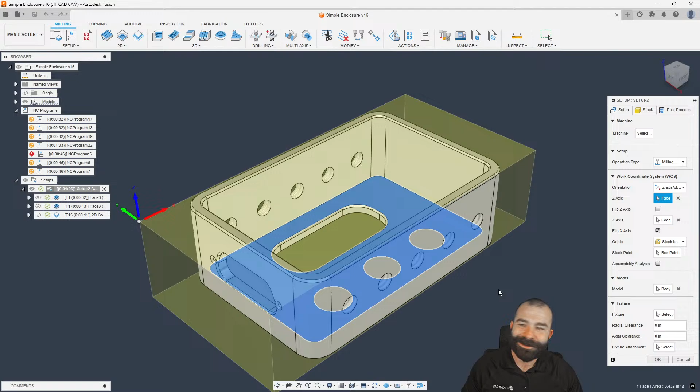Oh, dude, I tell you what, it's Friday, man. Yeah, I can change my screen. How's that look? You want me to start over? Let's start it over. I tell you what, guys, I have the worst luck. I need somebody to sit in the background and change my screens for me and fix my audio. Maybe one day I'll be a big enough streamer for that. So let's start that over.

So as I was saying, I'm going to go ahead and go into my actual setup to my part, and I'm going to select the machine. Now, in this case, if you don't have a machine or you haven't downloaded that machine, again, you guys can reach out to me. I'm happy to help you guys and build content around this, as I've built several videos around machine simulation. But what I'm going to do is I'm going to create a machine definition.

Now, the key element here is in the kinematics menu. I'm going to reorder some of this to set it up as if it is just a standard kind of table, fourth axis, maybe like a Fadal 4020, Haas VF series, things of that nature, right? So what we want to do is we want to organize everything. So our A axis sits on our X, on our Y. Our Z axis, of course, has the head to the machine, and so forth and so on.

Now, commonly, your rotary axis is going to point a specific direction. If you're dealing with an A axis, it's probably mounted on the right side of your machine. Now, for some reason, I've seen this, you actually mounted it on the left side of your machine. Well, you actually have the ability to go in and set a custom orientation. Now, what we're doing is we're spinning around X, and you could say either in a clockwise or counterclockwise fashion by just simply changing that one to a negative or a positive, right?

Same thing would go, on some machines, maybe you mounted your A axis to rotate around Y. Again, we can go in and we can plug in that, creating a custom controlled rotary axis with our machine. Now, if we're working with something a little more advanced than that, I would actually tell you the best thing is again, we build you a machine definition for 5-axis. But as you're going to see here, somebody just brought this to me the other day. They're actually working with an A-B axis machine because of the way their rotary is set up. And from that, it is still the same kind of system.

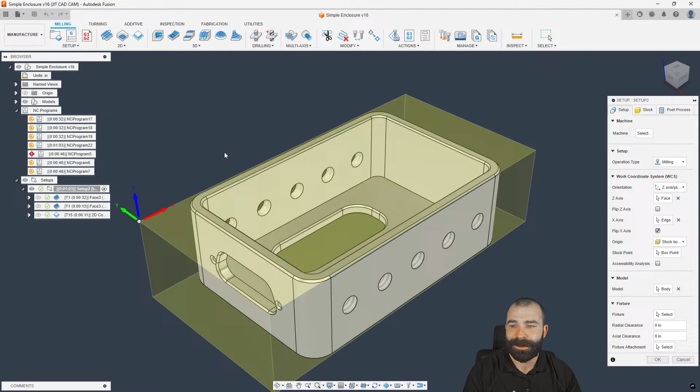Maybe we lost Brett. Presumably, I'm going to guess Brett wants to see polar machining around the C-axis, but he may be talking about something with the A-axis. Now, if he was talking about something with the A-axis, what we would really need to do is start to work with rotary contour and rotary parallel, right? That would allow us to create our live A-axis motion, whether we're doing a pocket or machining out those areas.

Now, if we wanted to do something with C-axis polar milling, what we may have to do is, one, have a toolpath that allows for it, but two, when we post out, we need to make sure that the post supports this. Again, if your post doesn't support it, we're happy to add it, but I'm going to take this Okuma post just because it's sitting here. We're going to hit edit, and as you can see up here at the top, there is no actual NC command for polar milling.

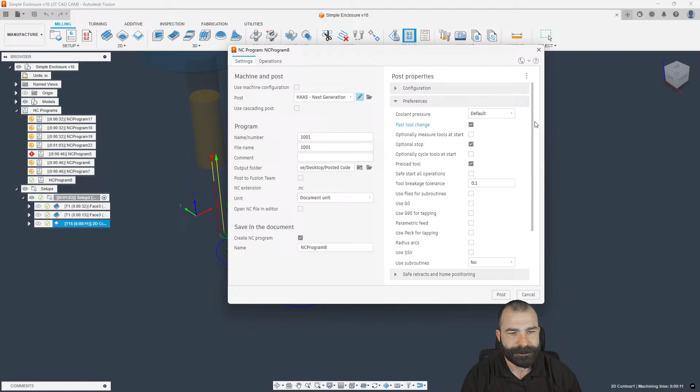Yep. So it's kind of like I thought. So C-axis on the UMC. Okay. So in your case specifically, Brett, I'm going to jump over to the Haas Next Gen control, and then we're going to edit this post. And with that post, you're going to see you have what's called use polar mode. So I'm going to highlight use polar mode. Then we're going to go back to our actual G code, and I'm going to add a manual NC. This needs to be an action. And then we're going to post in that use polar mode.

Now, if this is something you're going to find yourself doing quite often, I would highly recommend storing this as a template, right? So if I was to store this as use polar mode, in the future, all I have to do is right click on my setup and create from template. In this case, we're going to do the use polar mode. Again, I need it prior to the toolpath I plan to use it on. And from here, I'm going to go ahead and post process. Again, we need to switch to that Haas Next Gen control.

In this case, I'm not using Machine Sim, guys. You should use Machine Sim, but we're going to put it on a UMC 750. Let's see what we get for G code. So we have successfully posted. And in this case, you're seeing now we're doing an XC move around that part instead of XY, and I could repost this without the polar. Let's go in and post. We'll swap this out to 1002 using the same settings. And now we could do our side-by-side comparison.

So one, you're going to notice this program on the left is a mile long. That's because we are using XZC for all of our moves to go around that part. Now, over here on the right, we're just doing nothing more than a G1 and a couple of G2s to create those straight lines and arcs. So as you can see, Brett, it's very possible to use polar inside of your specific machine. You just have to create the manual NC action in order to achieve that.

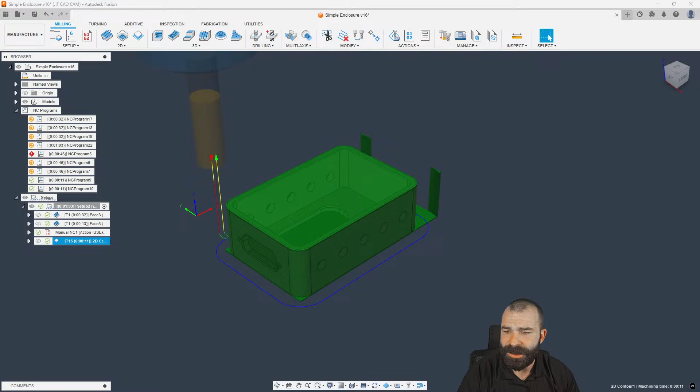So I see, Scott, you do have a question there. It looks like exporting sketch geometry to a step file. So yeah, you can't export out a sketch as a step file. You could export out a DXF. So again, if you wanted to export a sketch at any time, you wouldn't be able to do that as a step file, but you can definitely export sketches as a DXF at any time by right-clicking on that sketch and saying save as DXF.

Let's jump into this sub-spindle. I saw a question about sub-spindle. Travis, I think you missed it last week. We talked about sub-spindle just a hair, but let's go ahead and get a part out so that we can talk sub-spindle, what it looks like to do the grab and the retract.

Now, I did get a question this week: a customer was running a Mazak, and they were trying to do the sub-spindle, but it got to a line of code and it just stopped. As most of you know, on some of your mill turns with a sub-spindle, you have to define the sub-spindle offset in the controller. On most controllers, that is a B-axis offset, and you traditionally touch it off almost as if it is a tool, so that you set a length and the controller knows how far to bring in that B-axis. Now, if you work with somebody like Reynolds Machines and have a smart machine, they actually run a macro that always knows that number.

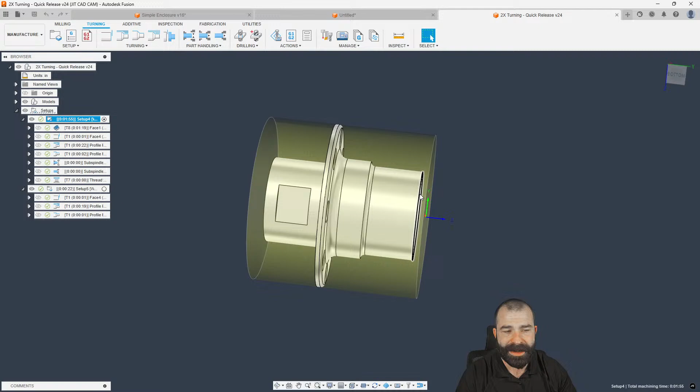Again, a little different scenario and a little bit of a change of a post, and we have that ability to set that up. So let's go ahead and remove what we already have here. So far, I've got my first setup. Again, nothing fancy. We're just doing a turning or mill turn, primary spindle. My part is selected. I have a couple of toolpaths already on this part, as you all can see. So with that, we can go ahead and start to work with our Sub-spindle.

Now, as always, the post does have to support the Sub-spindle, and there are tricks to that. But what you're going to see is we're going to start by doing a Sub-spindle grab, right? So what I need to define is the ability to grab onto my part. Where do I want to grab? As you're seeing here, this is actually being calculated from my work offset or the origin of my part in this case. And I can set that grab distance to whatever I feel necessary.

Now, it is wise to make your soft jaws, of course, make sure that they are going to be able to grab wherever you're grabbing, as well as that profile. But as you can see here, we could set our grab plane as 1 inch from model front. Now, if you wanted to make numbers a little easier to read, you may actually go based on your actual stock front, which in my case is where my work offset is. And we are now grabbing 1 inch in.

Maybe we take that a little bit further. But as you're seeing, we're just defining how far to rapid to and then how far into our part to come in and grab onto it. Now, if you don't want to do this in a live scenario, we can turn off our spindles at any time. But as you see, the grab is relatively simple.

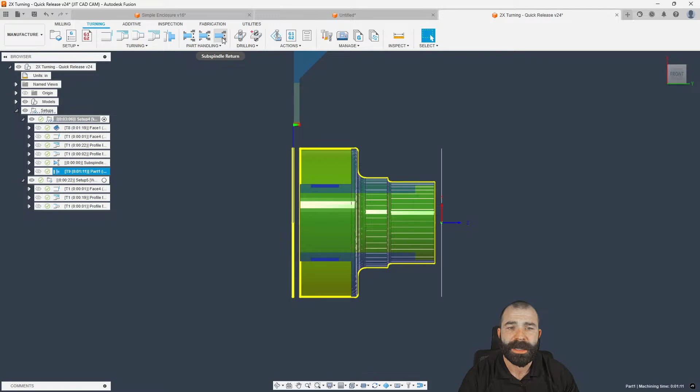So as you can see, we're now pre-staging that part off tool at the back of my part where I want to part off, so that I'm already there before we come in and actually set up to do our return, right? So now we've parted off our part. We can go ahead and do our sub-spindle return in this case. I'm going to send it back to a machine position. You can define on certain machines a machine position. Again, that may, for example, be -8 inches from your home position.

And then, because we parted this off, we want to keep both of our parts clamped, right? We don't want to release what's in the headstock when we move over to our sub-spindle. So we're going to go ahead and hit OK. And that is basically it. All you have to do is really define the grab as well as the return completely separately.

So sub-spindles have an offset for their jaws. It does. Again, a lot of controllers support that. I can't remember what it is off the top of my head because it's very rare that I have to set it.

But for a good example, maybe I'll go back to the bird's-eye view, right? You have your 3 jaws, and if you don't have them aligned and they need to overlap, you would collide your main and your sub. Your controller has that ability to set an offset in the C-axis in order to control that. Travis, I hope that answers your question.

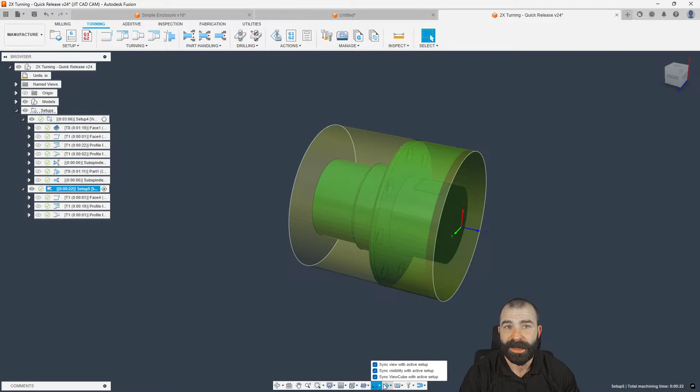I guess I can expand on this. Now that we've done our sub-spindle return, what we do need to do is say on our second operation that we are in the secondary spindle, so that when we program inside Fusion, we're actually working on the sub-spindle, not the main spindle. From that, we could also make sure our stock is from preceding setups, making life very easy. And as you can see now, my stock has automatically flipped around because I have my synchronizations turned on. I highly recommend this for a lot of you. That stock from setup 1 has now carried through to setup 2 as we're working back the other way.

So I see another question come in. What do I think about the heights? I have mixed feelings about it, but the more I use it, the more I like it. I think I'm just one of those guys that's been using it for the last 8 years, and it's a hard habit to break, right? And again, I think we're going to see more of that transfer over possibly into the lathe side of things. It would be nice if we ever see machine sim in the lathe, that we're going to be able to see our chucks and set everything from chuck heights.

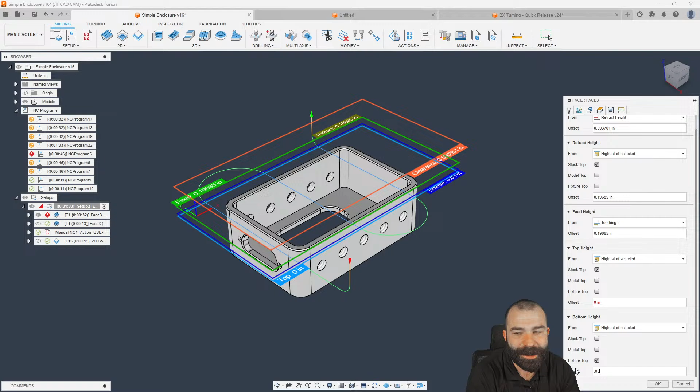Again, if I go back to my simple enclosure here, for those of you that don't know, the heights tab was recently changed. However, a lot of the information is still the same. If you're somebody doing 3-axis work, it's probably more of a nuisance now because you had to relearn it. But once you relearn it, it's a whole other ballgame. The fact that you could aim for a bottom height of the highest of selected, and then say fixture top, which a lot of people overlook, means if I had this sitting in a vise, I could go all the way down to where that vise is and still stay maybe 50 thou above that, right? So there we go, I'm back. Once you start to get comfortable with it, it's very valuable for being able to set up.

So I see a few more questions come in. How to import a vise and/or part into the machine builder to check part clearance, and is there a way to default a vise into a setup? So Brett, there's no way to default a vise into a setup at the manufacturing level. I do have a really good video on this where we do one part with multiple vises or multiple setups. But in this case, I'm pretty sure I should actually have a jig and fixture already built. It's been a minute since I've used this jig and fixture, so we may have to clean this up. So let's open this up before I bring it in and start to work with it.

So what I've done is I've built what's called a parameter control vise. And what that parameter control vise has the ability to do, and what you're seeing me do here is I'm actually removing this dummy part out of there, is I have all of my information set inside of Fusion based on whatever I need to define or however I'm going to machine my part, right?

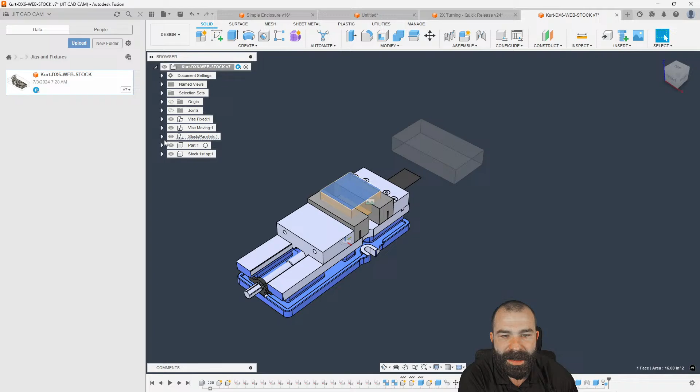So again, it looks like this vise has had better days, and I may need to do a little bit of fixing on this. So let's see what we have going on here. You guys are going to get to experience this in the real world scenario of me trying to troubleshoot a vise that I built a very long time ago. And let's see here. So we have our vise jaws. It looks like, oh, yep, that was probably overrode so that we could do something else with it, right? So let's leave that at 2.625, I think is the number we're going for.

Again, you can see that that stock actually sits on those soft jaws. And as you're seeing, this vise was completely brutally broken one time long ago. But as you can see, now that I have a stock here, I'm going to go ahead and remove my other stock because I don't need it. Let's go ahead and get that out of here. But as you see, we now have our actual stock. We have our vise jaws and everything set.

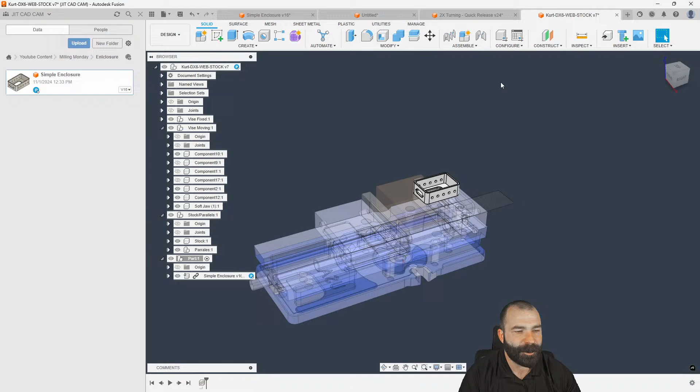This is where I would go to my part location and I would bring in whatever part I'm working with, right? So in this case, we're going to go back to that enclosure. I can drag in that actual part. That is going to place it now at the component level of the part. And again, this is where I could use a joint to place this. We're going to find out how badly broken this model is here in a second.

And now, again, as a lot of people ask me about this, yes, I'm using a physical stock body here, or a component for stock. And the idea is that I can trigger a lot of toolpaths from this, right? So as you're going to see, I'm going to go ahead and go to my parameters page. And I think we might luck out here. So we do have stock sizes as well as a parallel height.

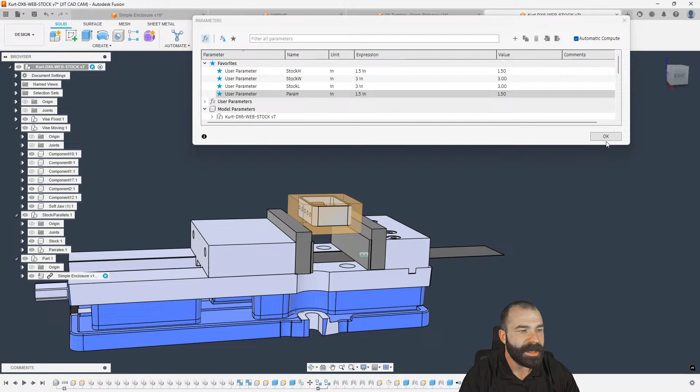So if we go ahead and change my stock to 2 by 3 by 4, actually we could go 2 by 3 by 3. Maybe we go 1.5. You're seeing that vise update in real time, even to the extent of how big my parallels are to raise that up, right? So as you were questioning about the height side of things, right?

When I go to manufacture this, I do have this set up already on this lovely Brother machine because I'm pretty sure I was testing this machine sim for none other than Hybrid Machining, if he's still in here. But what's going to happen is when I create my setup, again, we have that ability to go through and redefine everything. My stock is coming from my solid that we created as stock. So we don't need this one. We need the stock box. Again, my setup, XYZ position. My model is based on my parts.

Now, I can go as far as setting up my fixture. Again, you have that ability to define all of this as a fixture as well that now is controllable with radial and axial clearance, right? Again, our part position, in this case, where do I want my part to sit? In this case, I could go ahead and place it on my table. I know this is a little ugly as we're moving quick. We're also backwards based on that vise. But as you can see, you can get it all in here.

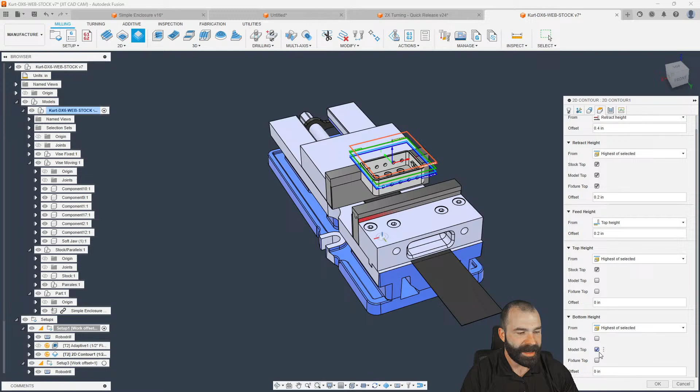And then as we talked about, if I went in and did something like a 2D contour around my part, again, my lowest bottom height could actually be set to highest. And then I could say, go to fixture top and 50 thou above fixture top. So again, based off anything and everything when you're programming, we're automatically recognizing now with that new heights feature that we want to go above the fixture a certain amount.

Now, if I was doing something again with a 3D roughing scenario, I actually did a video kind of talking about this last week, we have what's called fixture avoidance, right? So again, this is very valuable when you guys are working inside of Fusion, where down here I have a radial and axial clearance, and I see Matt in the chat, not to throw Matt under the bus. I feel like Matt messaged me about this last week.

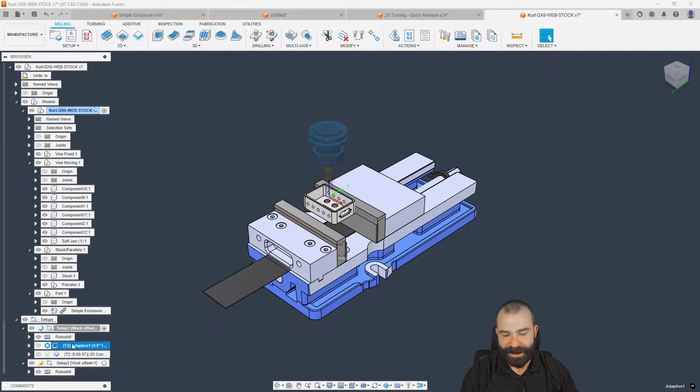But as you're seeing, I can set my radial and axial clearance to be much smaller, again allowing that toolpath to get much closer to my fixture from a 3D toolpath standpoint, right? So again, I've seen this quite a bit where these new settings, although they seem like a nuisance at first, as you're seeing programming become quicker, it's actually helping your templates out if you're a template person like me, right?

So I did see a couple more questions come in. Brett, I hope that kind of answers your question. There's no default way to use a vice. You could put the vice in the machine sim if you wanted. I highly do not recommend that at all.

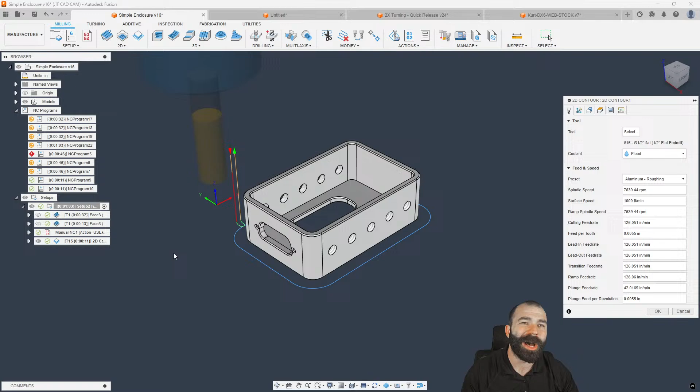Yeah, they did update it, and it was a bit confusing. I think the confusing part, and this is just my take on it, maybe Autodesk listens to me, it's too late. But I think if we would have actually set it like two updates apart, right? Update number 1, don't make it where I have to select highest or lowest. I really did like the fact I could come in here and say model top, stock top, yada, yada, yada. I think that would have been cool.

But because you now say highest, you could actually grab all 3 things as a precaution, and then it would avoid that based on what is the highest or what is the lowest, right? So that's, in my opinion, again, you give and take, right? Sometimes there's good, sometimes there's bad.

So let's see, we got another one. Is there a way to force Fusion to use polar mode by default without putting manual NCs each time? Technically, there are ways to do that, yes, inside of your post. I would need to know more, if it's on the mill or on the lathe side, as to why you're forcing that or wanting to force that.

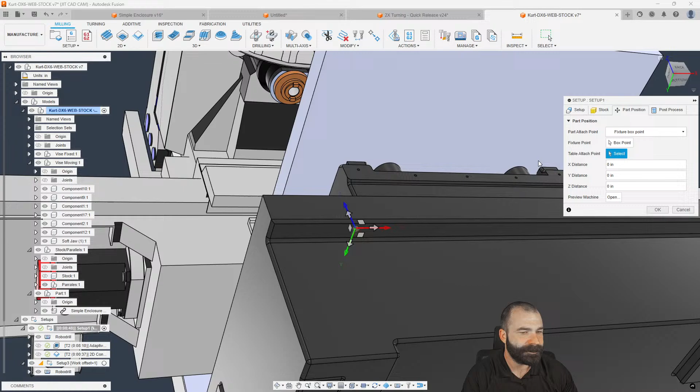I'm also going to go through and possibly fix this terrible setup here that all of you are probably wondering if I'll fix. There we go. And then we are going to do fixture attachment down here with this joint origin. We have our table attachment. There we go. Cool thing too, as you guys are putting those questions in chat, you can now preview on your machines too. Kind of a nice thing to see, are you going to over travel your machine or not?

Now, this machine isn't built with limits. If this machine was built with limits and you are working with the concept of something having more or less travel than needed, you could actually see that in real time here, right? So we could put our part on the table. And what I like to say is I can now program and know when I go to the machine, where does the part need to go, right?

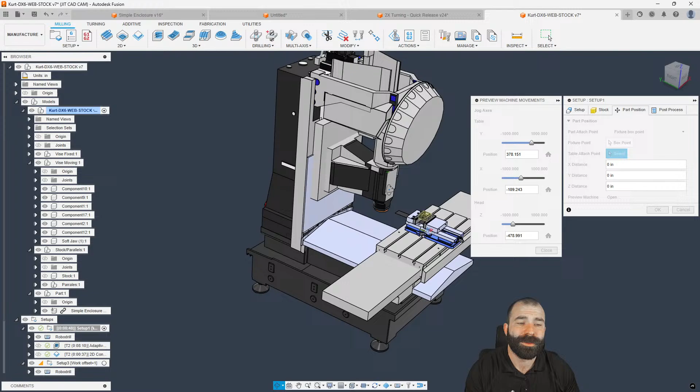How many times have you made that mistake where you go in and you put the part somewhere, then you go try to program it, and then you get machine over travel limits at the machine? Fusion with the right machine sim build can actually handle that for you and tell you issues before you ever get out to that actual machine.

So I see Eric in chat. Hey, Eric, nice to see you once again. Looks like you're in the shop. So if you guys didn't know, Eric actually makes bagpipes. So they use some older lathes and a little Mach 3 mill, and they do woodworking, but they use Fusion over there. I got the chance to stop in and meet Eric and have dinner with him and his family, and I had a great time.

That actually leads me to ask, where should we go? Where do you think JIT CAD CAM should go for the next road trip? So I do know I have a few things in February down in the Chicago area, but I really want to start to make our way out to the West Coast at some point.

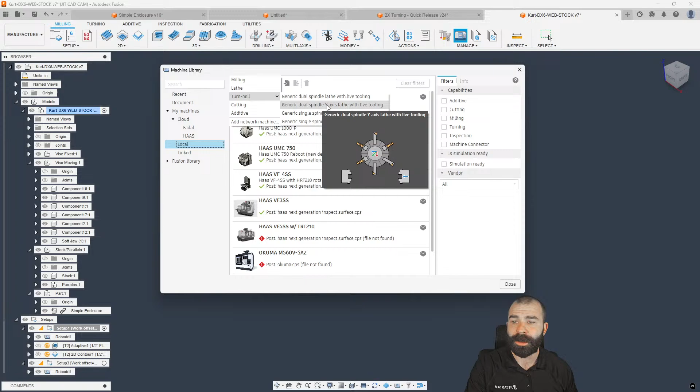So I've had quite a few people reach out to me that have just a generic spindle lathe with live tooling, and because that machine doesn't have a y-axis, it will not actually post out those y-axis moves, as you can see here. Now, if your machine does have a y-axis, of course, you could always add that back in. You also have main spindle versus sub-spindle type setups as well to be able to define your machine inside of Fusion and control your post and not actually have to spend the money for any of those post-processor edits.

Eric, I don't know if you know this, anywhere is warmer than where I'm at in January. We get more negative temperatures in January than some places get positive temperatures.

Yep. So no y-axis. So again, if you built a machine definition here, as you see with no y-axis, it will actually force all of your... There we go, and we're back. So if you build your machine without a y-axis, it will control most post-processors and not spit out y-axis moves when you're posting. So it'll put everything in XC automatically.

Cool, cool. Any other questions? Anybody else have anything else? I mean, we're really hitting the ground running today. We're 35 minutes into this, and I think we've gone through 15, 20 questions. I'll give you guys a few moments to put some stuff in chat if you have any questions.

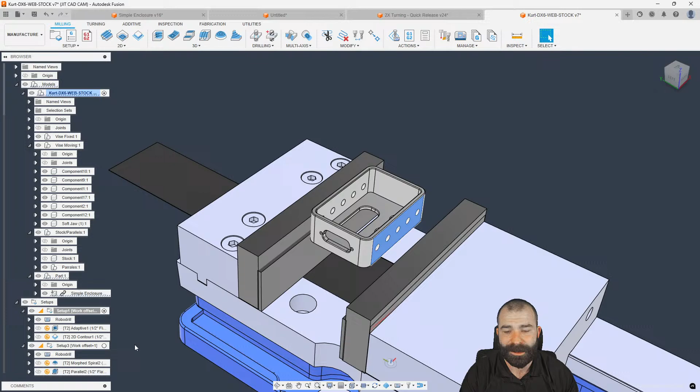So what they wanted to do was use the avoid surface machining. Now, they did a lot of work to just not machine on this side of the part. However, what we discovered was something kind of funny about the avoid machine surface settings inside of Fusion. If we were to go in and set an avoid surface and pick the side of our part, it didn't actually change their toolpath at all. So I'm going to set this up right here. I'm going to hit OK. And what you're going to notice is this toolpath basically looks identical to what we've already done. So it's not actually avoiding that surface.

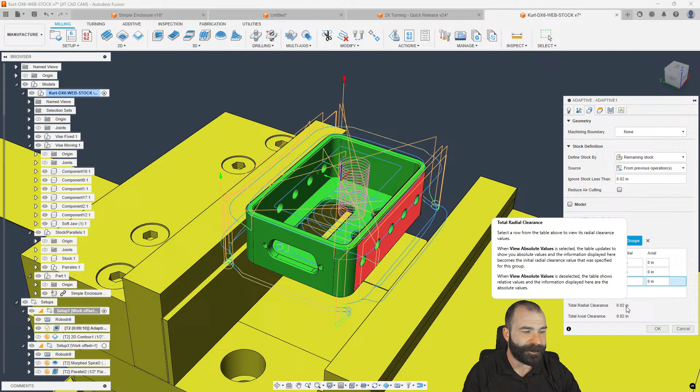It's still machining along the surface, but it needs to be given a dimensional tolerance of how far you want it to actually stay away, right? So this is really handy, and we'll look at a couple of scenarios here. But let's say I want to stay away from that wall by 0.1. By adding 0.1 in there, what you're going to notice is we are now going to avoid that outside surface of that wall of that part.

But now something to keep in mind, this is a dangerous game to play because as we're avoiding on this side over here, we will start to avoid on the inside of our part.

Now, again, Autodesk, if you guys are checking out this channel in any way, shape, or form, we appreciate you for watching the videos. But when we define avoid surface in certain scenarios, we may actually not want it to go to both sides of that wall.

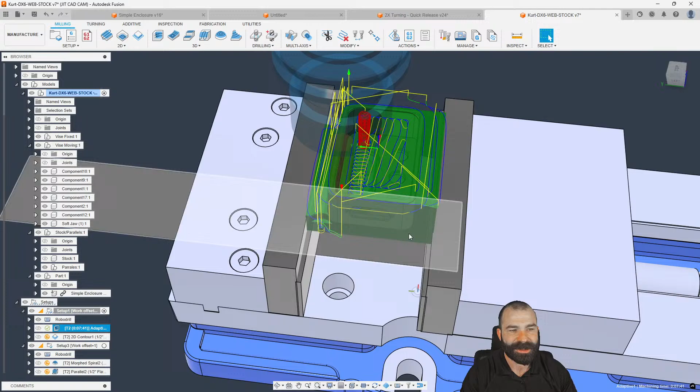So if I was to get really crazy here and say 1 inch, what you're going to notice happen here is based on that wall of avoidance, we're probably going to get no toolpaths down there on that side of the wall. And actually, we're not getting anything inside either. So as you can see here, it might be a little tricky for some of you. Let's get the toolpath out of the way.

Notice how we are staying 1 inch away from this surface on both sides of our part, right? So we're 1 inch this way and 1 inch this way inside of our part. So that avoid touch surfaces, when you're dealing with close walls to pockets and things of that nature, can actually cause some additional problems that some of you may not be aware of.

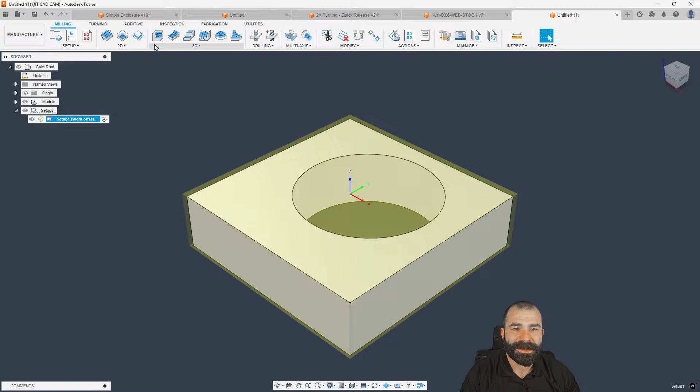So when I machine something, again, this is a relatively simple part, nothing crazy here, if I wanted to go in and do the bare minimum to machine this part, what you're seeing me do is I'm using 3D toolpaths, right? Let's see if we can pull one of my favorite tools, the 1/2-inch flat, for all of you out there. And as you can see, we're now roughing out that part. We're leaving basically 20 everywhere and anywhere.

And then if I went back and I used 3D contour, now this is where that avoid touch machining can actually come in very handy, right? So I could go in and I could say, you know what? I want to avoid this wall by 10, right? Because I'm going to come back and cut this wall with another toolpath, but I would still like that tool to go all the way through and machine all those surfaces, right?

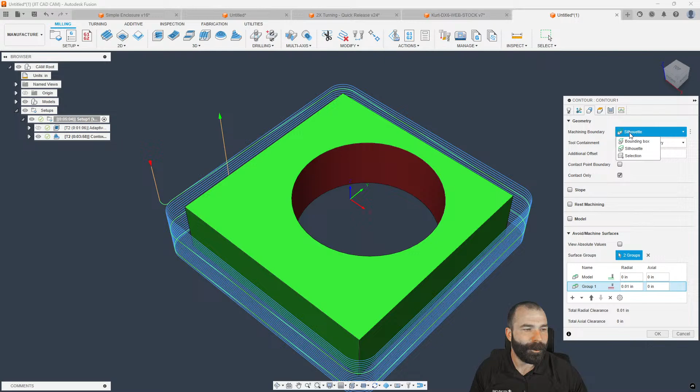So again, this is something that you could set up inside of Fusion. And what we're going to do is we're actually going to say selection boundary and then give this nothing and try to get a toolpath on the inside of our part. And of course, because it's a through hole, go ahead and change that into a flat bottom hole to show you what I'm trying to signify.

Let's go ahead and add that. We're going to go ahead and do another extrude based on that sketch. And for the sake of this, we actually have to do two-sided here. There we go. And let's go back to our manufacture. So again, let's go ahead and regenerate everything here. We're going to go ahead and edit this. We're going to go back to our silhouette.

And now you're seeing that we're actually machining inside of here. And the game plan is to still leave 10 thou material on these walls, right? So that when I come back with my final path, I can actually do my 2D contour with my wear setting and not have to go out and cause all these additional problems and force something through, because I now have control at an individual surface level on how close that gets to everything.

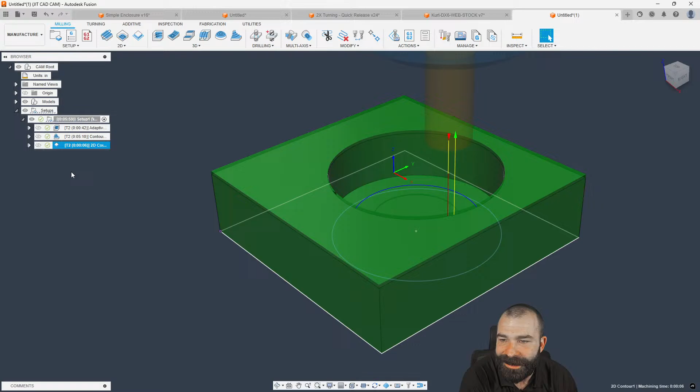Well, that's good. I mean, everybody's new at some point at everything they do, and I'm glad to see that you chose CNC machining. I actually have a really cheap CNC router in my garage that we did some Pinewood Derby cars on, and I've always thought to myself, maybe I should make on-machine content for the absolute beginner. You know, buy a $600 router, learn about work offsets, learn about touching off tools.

With that, I'm going to open the floor back up to anybody and everybody. If anybody has any questions at any time, feel free to throw those in chat. Let's go ahead and see what you guys have. I'd love to see the problems that you've encountered throughout the week or any oddball questions that you have about Fusion and being able to use it for your manufacturing experience.

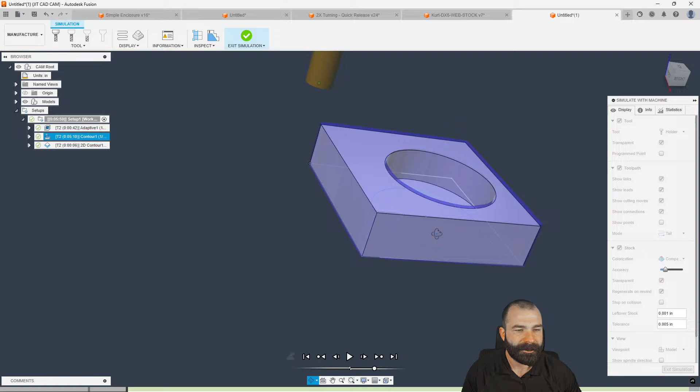So again, I'm just pulling this up so you guys can see it. We went ahead and left our 10 on our walls around this part. Based on running through our machining, we're going to go ahead and skip to the next set. And then from there, we could go through and do our final pass and clean up that wall. And what you're seeing is those surfaces are being removed.

Again, I have my accuracy turned way down. That's why you're kind of seeing the overlapping surfaces. But that's kind of why I like the new avoid touch machining, it's a new way to think about how you can actually set up those parts. Can we do a demo on inspection programming? I assume you're talking about Surface Inspect, right, Brian?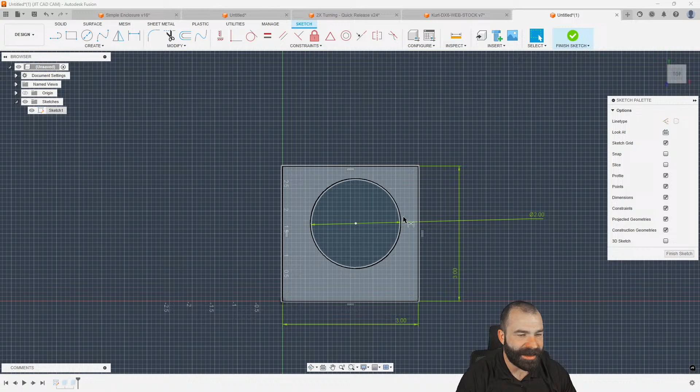So I'm going to go ahead and set up some inspection stuff here. But before I do so, let's go back and just kind of fix this part in case you guys want to see the G code on this. We'll get some pretty standard numbers. And I'm just going to put this right on center. And from that, we now have that easy to use shape for the inspection.

So what I'm going to set up is I have my setup here for milling already. I'm going to jump over to the inspection tab. Now, I am going to tell all of you that in order to do anything other than WCS probing, you do have to have the manufacturing extension.

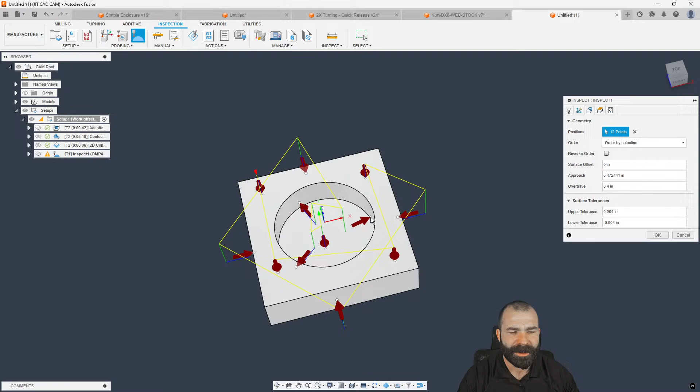So let's say, for example, I want to pull 4 points around the top. I'd like to pull also 4 points around the outside of my part. And then lastly, I can place however many points I want inside. Let's add a 4th one to the bottom. Now, something neat about this path is I have the ability to always drag and place these points wherever I want them. Now, what I would say is this is a generic version of a CMM.

And the reason why I say it's a generic version of a CMM is because this is not going to give us GD&T data, right? Like, this is what I like to use for first article, last article, idiot proofing, like you just pre-finished an entire mold and there's 5 thou everywhere. You go in with this probe and then it tells you there's 5 thou and you're like, okay, good thing we didn't take that out, right?

So now we can set a lot of things here as well as our tolerancing on this part. And from that, we're just going to go ahead and hit OK. Now, what you're going to do is a traditional approach of posting out this code. You will need to use the specific post for this. So again, based on what you're doing at your machine, there are several post processors inside of Fusion.

Again, what you're going to look for is the inspect surface or inspection post to make sure that that goes out and does it. Now, if you can't find one for your machine, again, guys, just reach out. But what I'm going to do is I need to cheat the system.

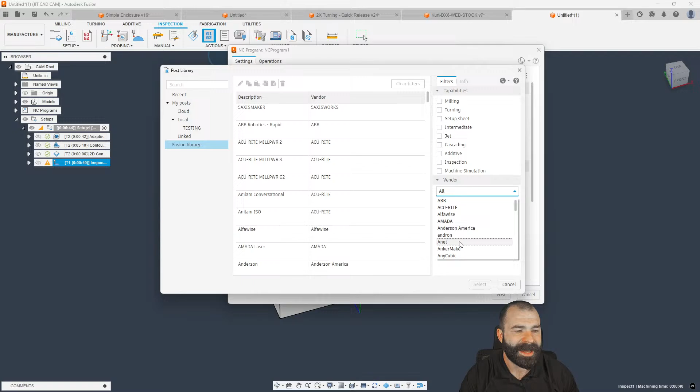And the reason why I need to cheat the system is because I need to actually use a random point generator built by Autodesk. Now, all of you can use this also, same post, where I'm going to go in and we are going to do an inspection results probing, right? So we're going to go ahead and select this. Let's just go ahead and throw it in my local library to be deleted at a later date.

What is now going to happen is we are going to auto-generate points of all different sizes in all different areas. So from this, we're going to go ahead and make sure this goes to a folder we can bring it back from. Now, what is being generated is, like I said, this is what your machine is going to dump. This or something very similar to this, right? Fanuc, Fadal, all these different machines. Maybe you ever run a Renishaw probe. Maybe the probe is spitting out different data.

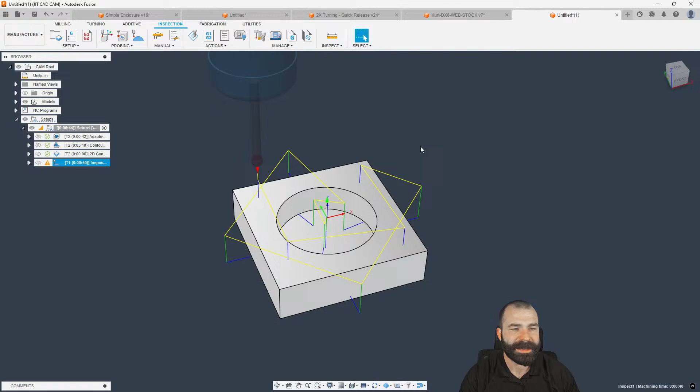So now, again, these are random points. They are random sized points. Yes, this part is way out of spec in every way you could imagine, but what you're seeing in real time is that is our inspection data coming back where somehow we've hit 2 out of all of our points in tolerance. And I say in tolerance, but I think you're going to see some of these points are way out of tolerance, that you're probably not going to walk this back in. The nice thing is we can actually see these results in real time. So as you're seeing, we're seeing our deviation, how much we're out, the error limits, all of that data is collected.

Again, this is not GD&T. It doesn't give you concentricity, right? But you could actually go out and create an inspection report off of this as well. And you could give this to your customer or whoever needs this at the end of the day. Again, providing this with your parts and setting you apart from somebody else. So let me go ahead and create that inspection report one time. Let's put it on my computer this time, which should populate in Chrome. And I'll pull this inspection report over.

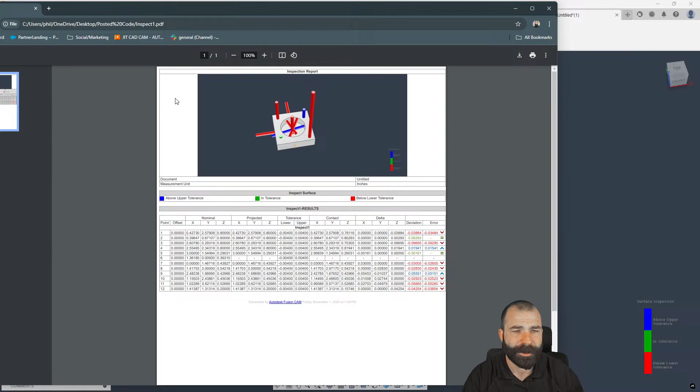Again, as you guys are seeing, you now have your full data points, what's in tolerance, above, below, as well as those points. Again, don't send this to your customer. This is a terrible example. But you have that ability with your machine probe to treat it like a generic CMM and double verify that information.

So give me a sec here, guys. I need to rearrange my screens again and get back to where you guys are all talking about. But I hope that actually answers your question, Brian.

I mean, the inspection results are great here, as well as we could dive in further. And there's also what's called a part alignment scenario too. So if you have to put a part back in for rework, you would actually use the inspect surface and create all of that information. And then we could say we want to realign our part. And what's going to happen is we're actually going to adjust our G code. We're not going to adjust the work coordinates at the machine, but this would allow us to go through and correct a deviation of what's going on.

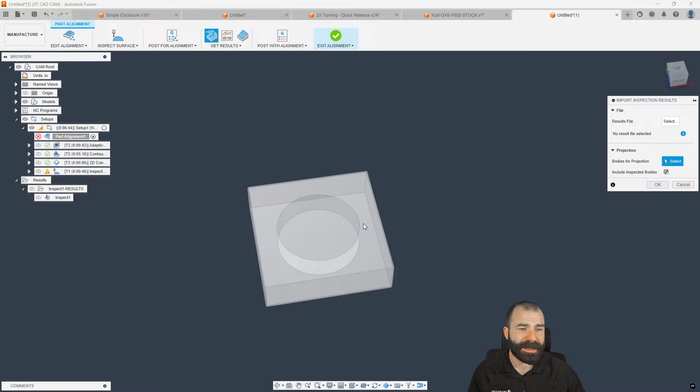So as you're going to see me do, we could go in, create our part alignment. We would post for alignment. Then we would bring in our results. And then we would repost with the actual alignment code for the adjustment. So again, super neat at the end of the day that you have the ability to go out and do this stuff. We go ahead and grab that file one more time.

Again, we've now brought that in. We could show our alignment deviation. Again, these are all random, but what it's telling me is how far rotated we are out. We said 5 axis, how far positionally we are out to average those points back in to get our part into place.

So I see we have another comment down in the chat. Love the videos. What is the best way to learn Fusion? What do you recommend? I'm struggling with a post processor for Okuma turn mill lathe. Well, a lot of things. One, I make video content in a real world scenario.

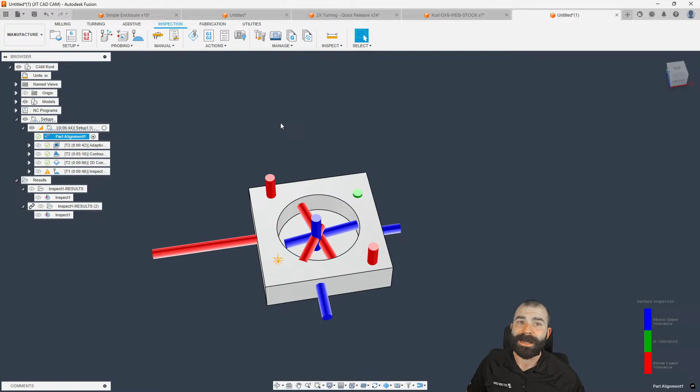I would recommend, though, at the end of the day, depending on what you're doing, the live connection feature of Fusion is a great asset, especially if you just want to chuck the part in, have it auto adjust, auto start the program after the fact, and run everything out.

So I believe, Brett, you can. From my understanding, Brett's question, guys, if you can't see it there in the chat, is if you just chuck the vise in the old UMC and you wanted to rotate C, you can go in with a probe WCS. And I actually did quite a good video on this, as we can actually do angle along Y. So what you're seeing here is I can pull this straight edge here. We could do an angle along Y for our probing.

Again, you could set a tolerance. You could also say if it's askew by a long shot, shut down the machine, and we could actually go up and override WCSs and things of that nature. So maybe you set work offset 1 in this case to be the part perfect, but we're going to use the actual offset number 2 to be able to go through and control everything, right? So again, you do have that angular probing feature for probe WCS to go in and pick those things up.

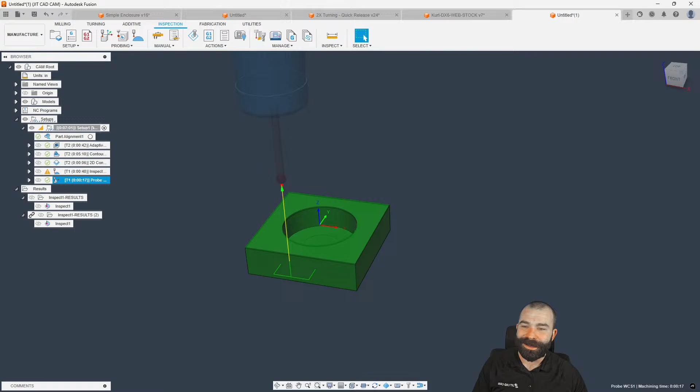This last video, we actually talked about creating custom things in your toolpath to actually, at the tool operation level, control things like smoothing or add special features outside of that.

Now, I did get some funny requests from a lot of you to rename stuff to whatever you want. I don't know what you guys do with your free time.

That's on you. But by all means, you can start to customize more and more inside of Fusion. And like we did on Wednesday, setting smoothing at the toolpath level is massive for a lot of you. And I say smoothing not from a tool point perspective, but machine smoothing, right?

One of the requests I got is, can you change it to smooth criminal and then put yee as the high accuracy mode. I don't know what that was about, but you guys had me laugh.

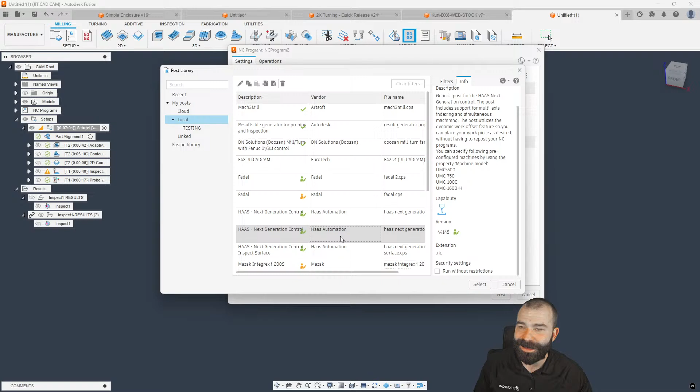So if I was to go in, as you guys have seen me pull a lot of these posts in, this one's 44145. Again, these two are basically the same post, but I've probably butchered one of them in one of these great videos. Now, with that 44145, we can actually verify that with the Autodesk website to see if that post is also up to date. So I am going to pull this up on my other tab as always.

And if you guys wanted to, you could also get there via the tool library button, and then you could actually go download vendor library. This will take you into the libraries online, where we could move back over to the post tab. And then from here, we could check our post. So that was the next gen from Haas.

And then, oh, we need to go to post, not machines. And for some reason, we're not looking at posts, we're looking at machines today. So let's go ahead and go back. Maybe there's a bug on the old Fusion website. As you're seeing, we have a lot of different machines here. Oh, they just put the machine images here. So again, you see how often I get to come to this website and look through everything.

But we could also pull up the post library in another scenario. I don't know why it's not taking us to this page, but this was the page I was looking for. And again, it's still taking us back to there. So again, you can come in and you can verify the version of your post. One nice thing here too is if you're on a later version of the post, I always tell people to go back and look because you never know what has actually been updated.

So a lot of times I see a lot of people ask questions about, you know, hey, TCP cancellation has been broken, right? Well, it's been fixed. It was fixed on 610, right? A couple months ago. So going to the latest post, as long as you don't have a lot of major changes, can tend to remedy that problem.

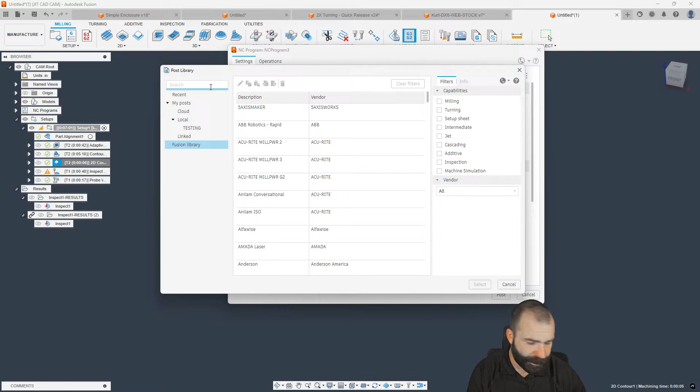So I usually, okay, let me jump back over here. I'm not sure it's MP CNC. Homemade 3D printed CNC. Nice. So if it runs on generic G-code, there's a couple places I could point you, like I said, Reed. You would go off the post library inside of Fusion. Again, there are quite a few different ones out there. The Mach 3 tends to be about as generic as it gets, Mach 3 mill.

As well, something like the GRBL post, very, very simple at the end of the day. And then you could even, if you really had to, step up to something like the FANUC post. Now, again, if you can't really find something, you're going to have to make changes to those posts to make them work. I know from my experience, because of the machine I have down in my garage, the GRBL post has a problem with retracting before going in and doing machining. And I had to make a few changes to that. But that's actually covered in some of my other video content.

So, King Marley, I would tell you, send me a message down below using the link. I'm happy to dive into that on my end. Go ahead and put in a support ticket with us. Let me know where you want it, like what line, and then I'm happy to see what I can do on my end outside of this and get it fixed for you.

Any other questions outside of that? Again, I see people coming and going. We're at 95. We're probably going to cross that 100 mark here in the next couple of minutes.

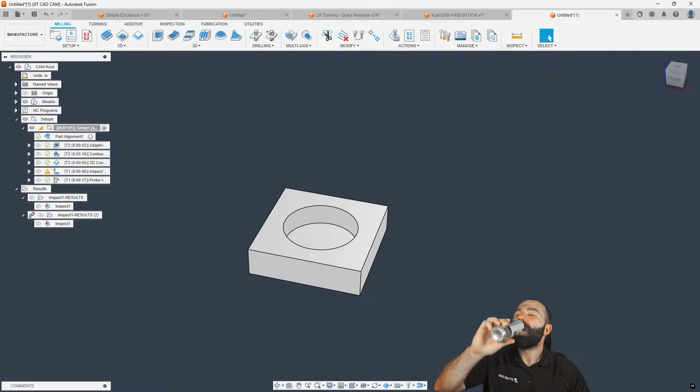In the meantime, let's see here. This has actually been some interesting stuff that I've had some people ask me about: should I get the manufacturing extension? And honestly, in my opinion, yes, because there's so much value in simple things. For example, I had a customer today reach out to me and they had a part kind of like so. Let me see if I can recreate this.

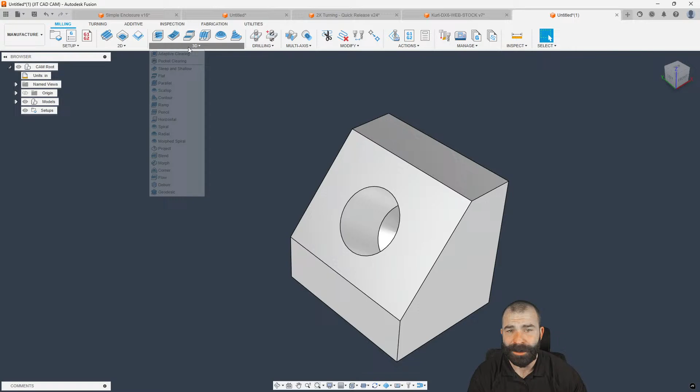And then they had a hole basically right here in this face, right? Now, they wanted the ability to deburr the edge of this hole. There's a lot of ways you could do it inside of Fusion. And honestly, the deburr toolpath was the easiest thing out there because all they had to do was say deburr. In this case, just give it a ball end mill. Again, we'll go to my lovely tool library.

And then from that, just define that I want to use a selected edge and then pick the edge that they wanted to deburr. Again, setting how much they want to deburr, but the ability to go in very quickly and deburr your part. Now, this is going to look terrible because I didn't rough this out, guys. I get it. But the ability to go in and adjust and set that tool so that you can deburr those edges as needed.

You could also use deburr now on top of that with tool orientation. So if we were to come in and say tool orientate this way, again, if we're working on a 4th axis machine, being able to do a live 4th axis deburring as well is something very, very valuable at the end of the day. So as you can see here on our part, we're going to set this up based on our y-axis for tilt. And now our tool is upside down, so we'll go ahead and fix that.

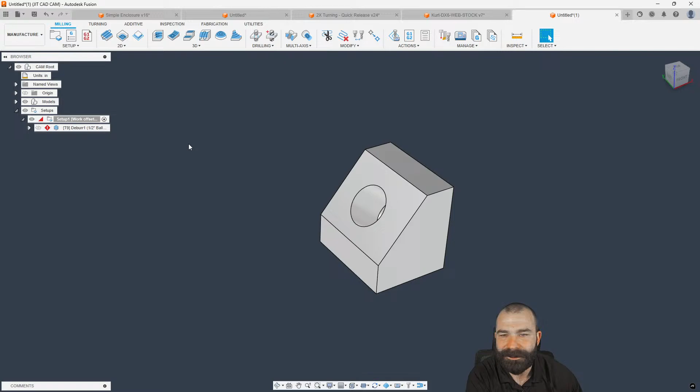So I see Brian out there, your favorite is the modify. You like the modify, huh? The ability to trim and change all of those things inside of Fusion. Modify is pretty good. There's a lot of good inside of modify as well, right? So the ability to move your entry positions if you're worried about a seam on a part. Again, being able to get rid of paths that you don't want. Very, very handy.

We kind of talked about this before when we were looking at roughing out our enclosure. If I can get to the right part here, let's get this closed out. So we were looking at doing some roughing here, and we were using that avoid machined area. Now, it does work in some cases on most toolpaths. However, it may not work on all toolpaths, right? So this is something to keep in mind, that you may still use a traditional approach, but the ability to go in and trim a toolpath.

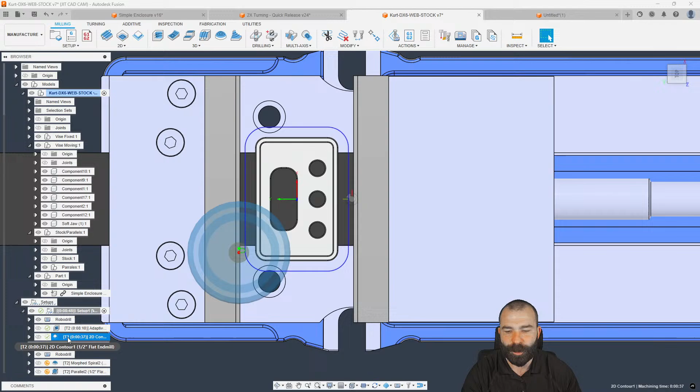Now, I can't trim this toolpath because it's roughing, but if we look at some of the other toolpaths, I'm going to go ahead and pull up 2D Contour. We can go in and actually delete part of this toolpath out, right? So again, the nice thing is I could do a single segment or an entire chain, but just like that, I was able to remove that area of my toolpath, right?

So another one, we got Lars in the chat. You guys and the lathe questions this week. I love it. So can you force polar coordinates? Yes, you can. All you have to do is define your machine inside of Fusion, right? So if you go in and you do your turn mill, you want to make sure you're building that without a y-axis to cause your polar milling to happen.

And what that is going to allow you to do is to always force polar, right? Because without that y-axis, you can't generate XY. You can only generate XC toolpath.

So again, as we went about this, I think this is what, 3rd time? Travis, you still out there? How many times? You got the tally board going? Is this the 4th time or the 3rd time?

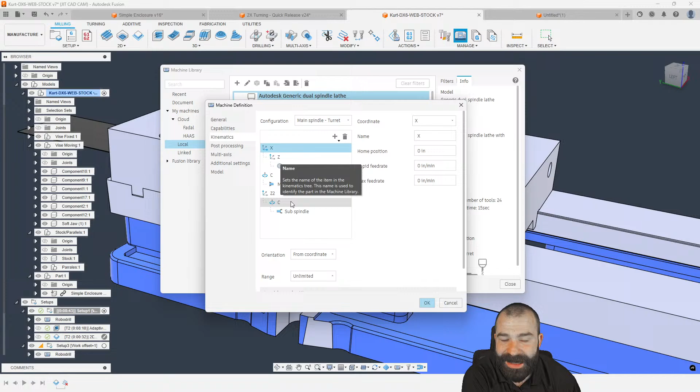But yeah, 100%. As you're seeing here, the ability to go in and actually set that up with the machine definition for a lathe or a mill turn machine will allow you to do that.

A couple other things, guys: you're talking about delete toolpath. One of my favorite things is trim toolpath. For example, if I had a clamp in the way of this part, the ability to go in and say, hey, there's a clamp right here in this general area, and there's a clamp here in this general area.

So if you're somebody that runs flat plate work or something, I can actually keep both parts of this toolpath, allowing me to machine one area and then machine the other area, right? So if I wanted to avoid clamps but still come back with that same toolpath and clean up those walls, it's completely doable.

So Lars, I would have to dive a little deeper into what is set up inside of your post processor, but to put you in a little better direction, it's based on your actual post. Let me see if I have a lathe post in here anywhere for me to tear apart live. So let's see here. Here's an Integrex post. Let me clean up my workspace for you guys.

There are several areas to set up polar as well, right? So use G0 polar. There's also the ability further down, polar interpolation true, and so forth. So you can force polar coordinates, setting that all inside of your post processor. This might be another way to help you out. Again, it depends on your post whether or not it's there, but by changing certain true false statements in your post on your own, again, saving you a ton of money.

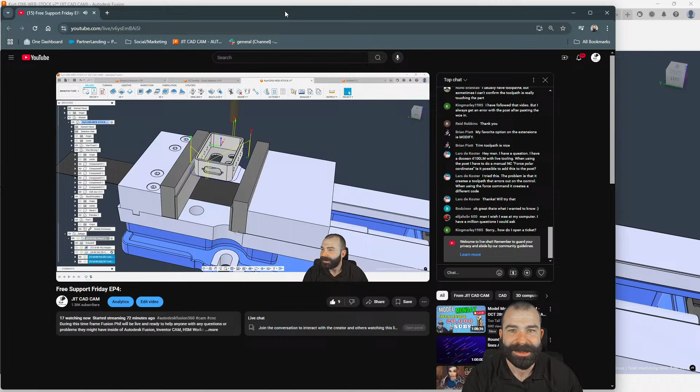Maybe I should pull up my own video, right? Should I show myself live while being live? That'll be interesting. Let's pull this over here. Y'all can see me in delay. I'm going to pause my own video before I drive myself crazy. And let's get OBS back over on my other screen, right?

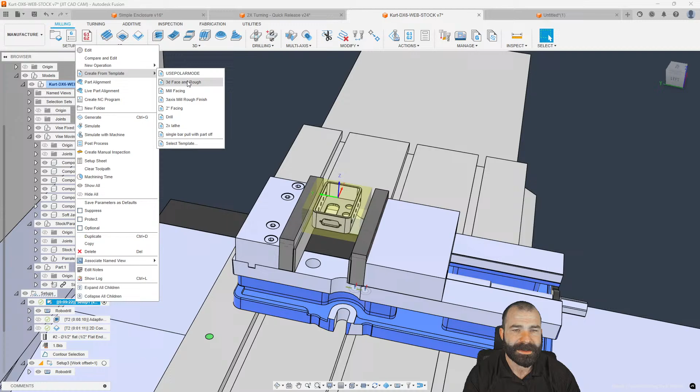But I would say get much more used to the concept of creating, in this case, templates. You could store this as a template. The reason that's valuable is if it's part of your workflow to the extent that you want it on by default, if I was to program a part like this, I could go to my templates, and for this case I have 3-axis mill rough finish. By copy and pasting that in, you're seeing this in real time automatically pick my toolpaths and my parts. Now, rest machining is turned on, so I would reorder this, and then we'll regenerate this toolpath.

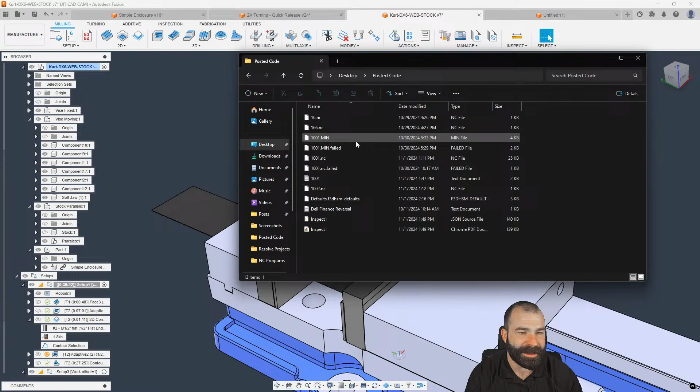As you're seeing, based on templates, you can add as many or as few toolpaths as you want, as well as settings. So that is a key thing I would tell somebody to do: look at using templates. You can toggle that on and it stores it at the template level. Another thing a lot of people don't realize is you have the ability to change this in your defaults. This is not a recommended way to go about this, but I'm going to dump my defaults, and then we're going to open these back up, because obviously I love to put myself in a terrible spot.

If we go into Visual Studio Code, you're going to see you have the ability to go through all of your defaults and set them. I'm being a complete fibber because it did not dump all of my defaults. Actually it did, it exported just my defaults, not all of them. There is a way to dump all of the defaults; I've got to remember how because it's been a while. Same with importing your defaults, but you can edit those in the CSV file format or the Visual Studio Code format and bring them back in, which would cause that checkbox to be on by default.

So, yeah, Eric, it's crazy what Discord has done for the world. Discord seems to be the best way I've found because you can share your screen, you can message, there's chat rooms, you can get in video calls with each other, and it doesn't cost anything, which is great.

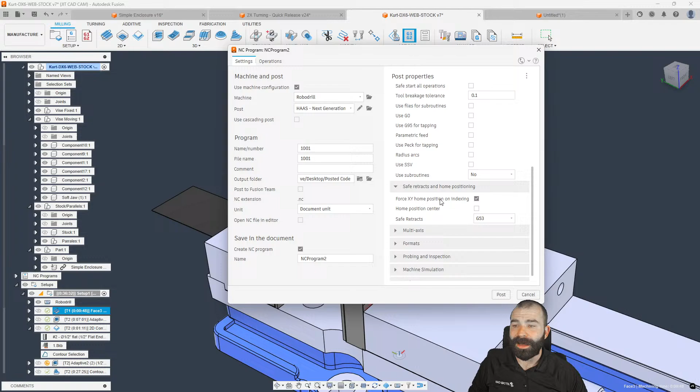But a lot of what we've done is we've done G53, and then we put it in an XY known location before and after a tool change. A few weeks ago, we had somebody whose umbrella sits lower than machine home, and we had to, after a tool change, get back up to height and get over to their part, right?

Can we bring back mill turn Thursdays? I'll tell you this. You send me parts and send me stuff for mill turn Thursday, I'll bring it back. I would love nothing more. I'm telling you guys this. I would love nothing more than you all to buy me a bunch of beers up there and me sit here all week live on chat and talk to you guys about the different parts of Fusion and different ways we can help you out, right?

OS VF1. Okay, so you're using a VF1. So is that next gen control or pre-next gen control? It's the classic. Okay, so the classic won't have it, but like I said, we can add things to that post to force a position. And again, one thing that will happen as you guys are seeing inside of Fusion more and more, is we would go in and possibly edit your machine definition to put that in its home position based on that, right? A lot of people don't realize you have machine 0 versus home position, but we could force two different locations based off what you need.

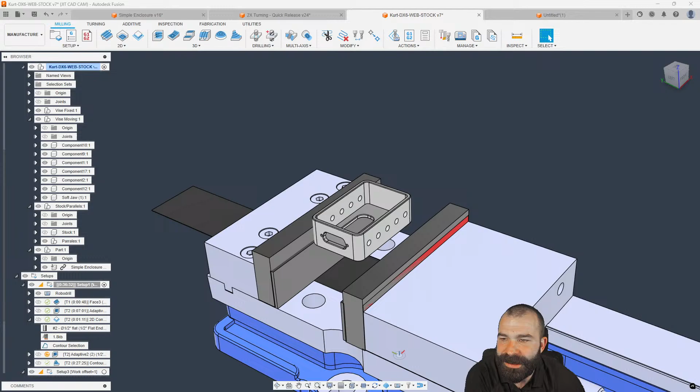I assume you're talking about in the background. So what's actually happening, and let's see if I can force this with all of this stuff going on, is odds are your in-process stock is actually regenerating, right? So if we catch this quick enough, we got those circles and dots here. That is the in-process stock in the background calculating out as the toolpath goes through, right?

So that's something you need to keep in mind: sometimes when you're moving fast or making changes, you make a change early in the process with all the rest machining. You have to wait for the in-process stock to also come through for anything that you're doing, right?

All right, what other questions we got? Oh, man, you guys are hitting me with a bunch of them now. Let's go.

Just ordered a Lang vise and accessories for over 10 grand. Could you show us how to set up a good template WCS probe thingy? I like that question. That's a good question. We'll jump back to that here in a minute. Let's run through these questions here.

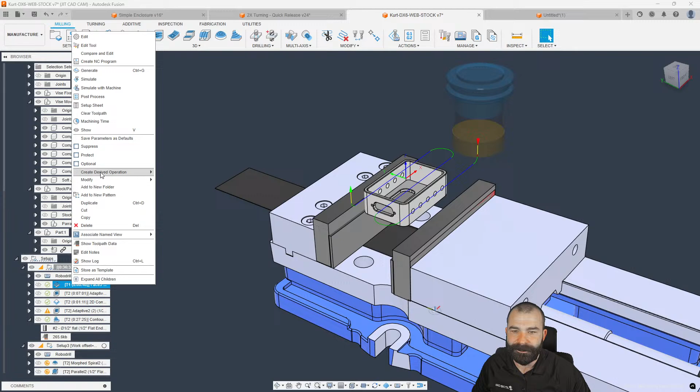Yeah, so again, with that in-process stock and rest machining, that is something that definitely can tie things up. So for example here, I have rest machining turned on, remaining from previous. If this toolpath was to become invalid, let's go ahead and clear this toolpath. Where is it at? I always miss it. Somebody's out there yelling in their phone. But yeah, once you clear that toolpath, it's going to have that problem until it regenerates your other toolpath, right?

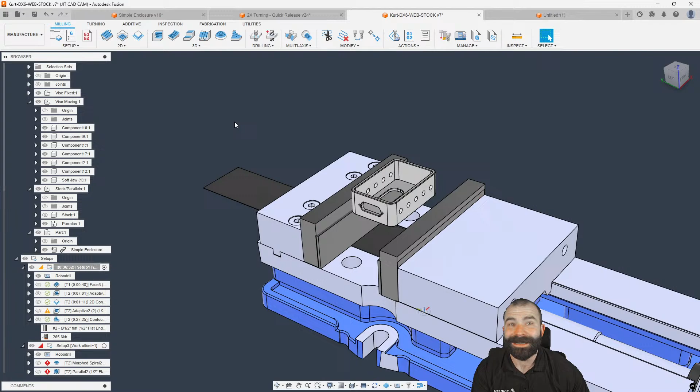Would I still recommend 3D on a turn mill? I assume you're talking about turn mill. You had questions before about the turn mill. Again, it's kind of one of those things that it depends on the part, right? So this flat here, would I do 3D? Probably not, right? If I was to open up another part here, the mill turn Thursday part, right?

When we start to talk about something like a pattern, I think there is advantages to 3D, but I also think in this case, doing something like a 2D and then taking this 2D and wrapping it around in a pattern might be a better value, right? So again, I could just do one pocket and then do a circular pattern, set the number of instances, whatever that is. This may be quicker, maybe, than going in as if I was to do 3D adaptive clearing. What tool number did we use there? Tool 9.

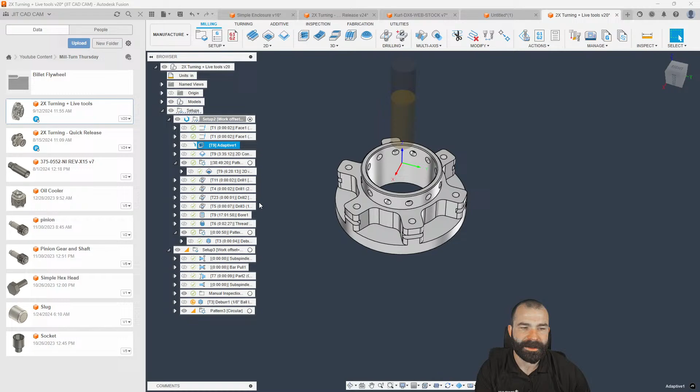And then again, I'm going to go ahead and take this toolpath and drag it up because, as we've talked about, the rest machining, right? There we go. And then let's regenerate that. So what you're going to see now is we're going to get a little bit of a different outcome based on how we're machining this part. And again, all we've done on this part is technically faced it off. So now because we are stock and model aware, this is a whole nother outcome.

So if I was to give this part a few more things, let's see here. Do we have our 2x lathe toolpaths? This is usually where I crash Fusion when I get way too far ahead of myself. So as you're seeing here, we're actually going in and we're turning that, and we're roughing that OD face. Again, with adaptive clearing, who's to say it's right or wrong, right? So now I'm using 3D.

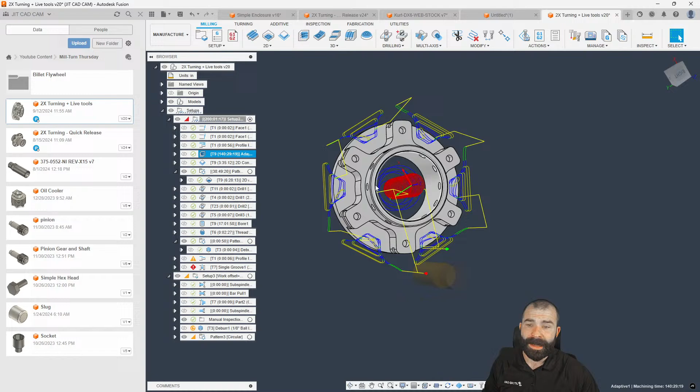Granted, we're still doing the inside area because we haven't actually done that with lathe toolpaths, but because it's actually using the calculated stock in the background, is that better than doing 2D and then patterning it, right? I don't think there's a right or wrong, and you don't need to do a pattern. By all means, I could have actually just went through and clicked stuff based on what I want, right? I could have went through and said, you know what? This is actually my geometry. Due to my terrible muscle memory, I'd probably do this one with 2D, and then you all hassle me in chat, right?

But let's go ahead and see, did you send over that part link, or are you going to do that at a later date? Let's get back here. So I haven't seen that link come through, guys.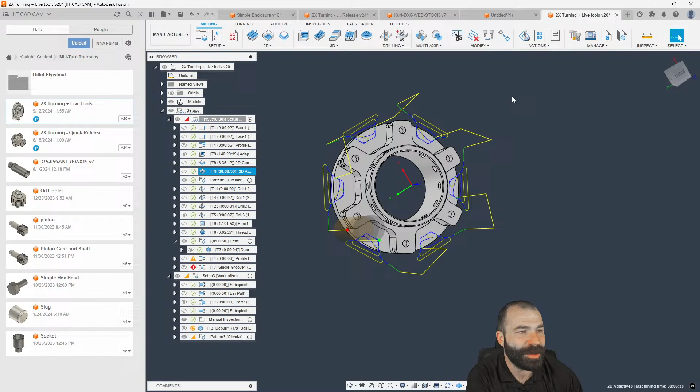There you go. So I think I can think right off the top of my head how Matt does that. Matt, are you doing that and then you're patterning it? Nice. So to show you guys, if you wanted a quick way to do it, as Matt is showing, is you would start out with a sketch, and then basically what you're going to do is an L profile. And then with that L profile, you can do a trace toolpath.

So what I'm going to do here is we're going to actually add a second sketch to this just to make this a little bit cleaner. Oh, let's undo that sketch. We want to sketch on this plane. So if that was the inside of my bushing, yes, I don't have the square actually modeled up here. But if I go in and I say manufacture now, create my setup, as you can see, my line for broaching is put here on the Z axis.

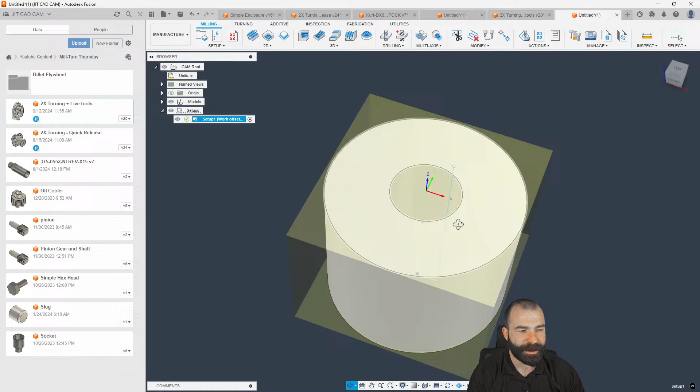Now I can go in and just like Matt said, he's doing a trace toolpath. Now, you are going to have to do some Hollywood magic on your end. I would say center line of your spindle to the tip of your broaching tool is very important. However, you're still going to only define this kind of with an end mill, right? Because once you know center line to the edge of the tool, you could set that as a tool diameter, right?

So as you see here, we go through, I can now pick that edge that I want to machine down. We're going to pick it a second time to add the second leg to that. And then I now have that rapid down kind of toolpath based on what I'm doing. Now with that, I have the ability to pattern, right? So again, as we could say setup, new pattern, we're going to do a linear pattern based on a direction.

Again, I could use that little tail for my direction. And then from that, I could say, you know, how many do I want to do? Or what I want to do is what is the total distance I want to go, and then divvy that up with number of step overs, right? So as you're seeing, you have that complete ability to set it up inside of Fusion. And before Matt puts it in chat, it looks like I have my direction backwards. So let's go ahead and flip direction here.

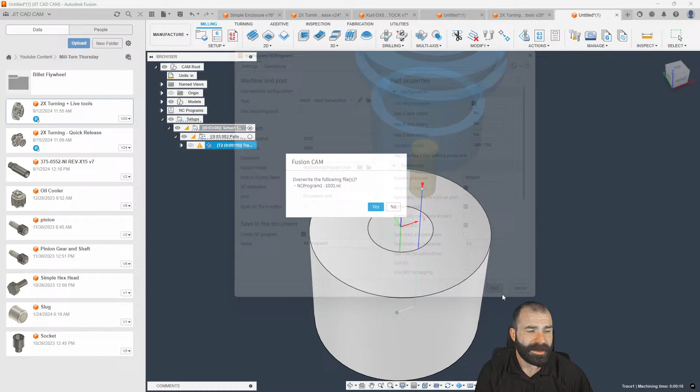So now we're going down and back to give it a relief. And then we're doing so with a pattern outboard to create those cuts, right? So again, once you post this out, and this is where we could do some Hollywood magic, but realistically speaking, once you have everything the way you want it, once you post that toolpath out, you could remove your spindle speed from that, right?

We don't need to turn the spindle on. We just need to run that cycle. And there you go. That is a very easy way. And that's actually a way I've never thought of until Matt just pointed out using the trace toolpath. It's genius at the end of the day. Now, this is written out longhand, guys, so it's not a canned cycle. If you were looking for a canned cycle, the idea of using the drill toolpath with possibly a couple of checkboxes or a couple of variables would work great.

So I did see a couple more questions come in. Yep. Cool. So it looks like that kind of answers that question for Noor. Outside of that, what else do we have here? Here, it works better. Maybe it's because of updates. So it looks like the problem fixed itself, right? You can't surprise me with anything nowadays. In the meantime, do we have any other questions?

Anybody else with curiosities? Again, I didn't think we were going to cover broaching today, but Matt Van Loo out there, good buddy of mine, just taught me something that I didn't know, which is using the actual trace toolpath works quite well.

Give you guys a few moments so that you can flood the chat again with a bunch of questions. How dare it work now, right? Probably after the part's already done. Every time. Any other questions? I see a total of 19 of you guys here.

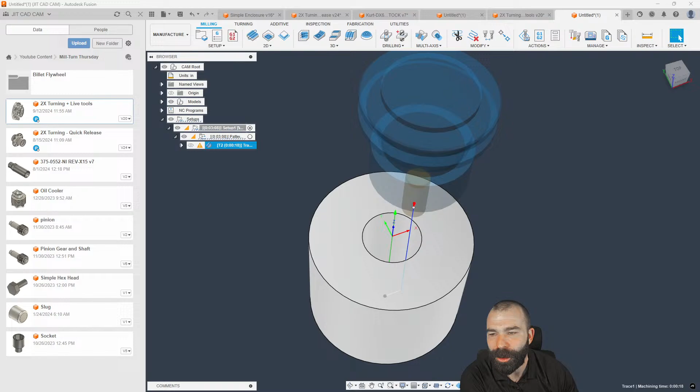5-axis surfacing and keep the tool normal to surface. Cool. So we can definitely work with that. So let's go ahead and try to think where I am hiding something like a mold to work on. Man. So you want to keep the tool normal to surface. Normal in which way, if you don't mind me asking? Because in the case of this part, for example, I believe we have tapered walls on it. I'll have to remind myself of that. If not, we can always add taper walls.

But if you wanted to keep a tool at a certain angle while you're doing certain things, it just depends on the toolpath and how you set that up. But in your multi-axis tab, you do have the ability to actually define. In this case, we would want to do a 2-point from point type of situation. We could also set tool axis limits, but the tool axis limits are going to be based on your machine.

Now, in other toolpaths, if we look at something like steep and shallow, the multi-axis is actually going to change where you're going to have what's called lead and lean. And then you could set a specific angle for that. And then you can even override your tilt angle. Let's say you always want to hold at 30 degrees, and then you could force it that way as well.

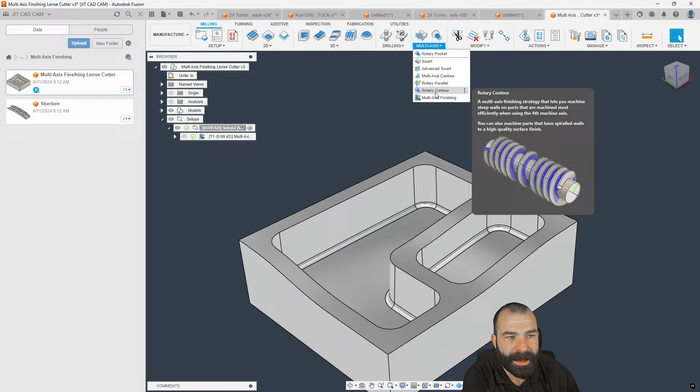The bottom of the tool normal. Yep. So you could actually set your lean angle, in this case, to 90. That would put the tip of the tool on the part versus the side of the tool. O-ring groove on a curved surface. That would be a little different where you would want to look at something more like rotary contour or rotary pocket. And the reason for that is you have your tool, but then you can change based on that tool so it is pointed at center line.

How do you add custom boxes to toolpaths? Well, Matt, you're going to have to go look at my video from Workflow Wednesday. That's how you do it. But to say the least, if you guys wanted to add custom toolpaths, I'll show you here again. But it's actually relatively simple.

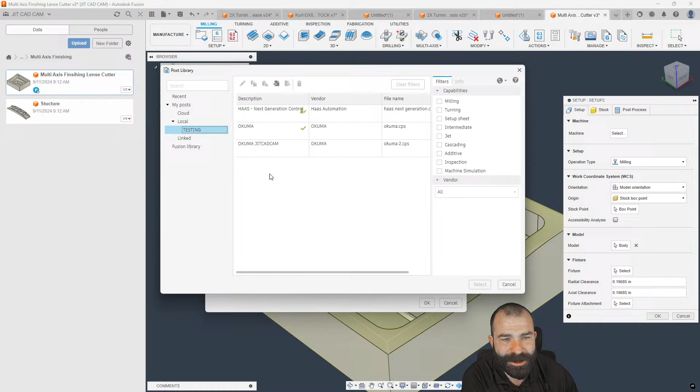So take, for example, in this Haas post, if I wanted to add a toolpath, actually, I'm going to have to back myself up here, guys, because the very first thing is you need to have a machine. You do need to define your machine. And as I've said in my video, you don't really need to go to the extent of machine simulation with a full build out. It does help, but we need to tie a post processor to that machine. So what I'm going to do is, as always, we're going to go ahead and butcher something here.

And I tied my post to my machine. I have selected my machine, of course. And now with that being said, let's just make sure that it's not already in here. Cool, it's not. But if I wanted to add something like a custom menu inside of the toolpath, the easiest way to do so is to take something that's already inside of it.

So the one that I did for an example on Wednesday was the smoothing, right? So as you can see here, I'm actually going to remove this because I did put it in here, but I forced this a different way. You're just going to change the scope from what normally says post. In this case, we changed it to operation.

When I hit save here and go back to Fusion, what you're going to notice is at the toolpath level, I now have that G1, G2, and now I have all these different options. Now, this is a pick list, so to say, based on what's going on.

But now, if you wanted to just do a true false or a checkbox, what I do recommend is you find somewhere that has a true false statement. So in this case, again, I'm giving you guys a crash course here. This would take much more than this. But if you wanted to go through and create your own property, let's say we're going to say use G10. Later on in my code, I do need to tell it what G10 is going to do.

But again, this can be based on your operation. And based on that being set to operation, what you're going to see now inside of Fusion is I now have a checkbox for use G10 or whatever you're going to label it as and whatever you're going to do.

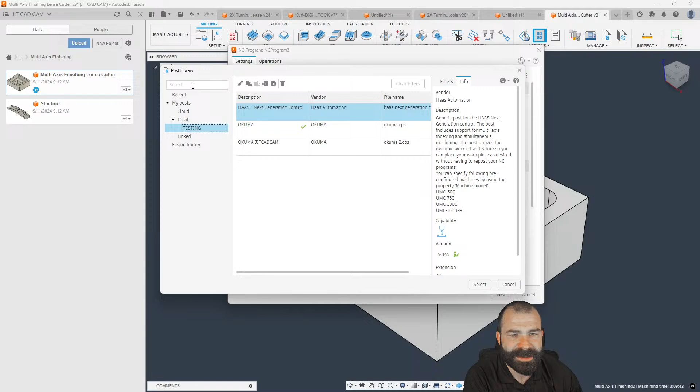Cool. Any other questions outside of that? I'm trying to remember off the top of my head. Let's take a look here. There used to be the ability to actually use one of the default Fusion posts that had it already set up. I do have a copy of it, and there are a few other copies out there, but it is completely doable to do a right angle head inside of Fusion.

So based on the empty space in between, that's going to be a little tricky. So if you were trying to do like two ears, right, and you want to drill this one and then wrap it down and drill this one, that would be a little tricky to do in the G code because the actual toolpath isn't going to put that info out.

Now, if you wanted a different way to do deep drilling, I saw somebody bring up a very valuable point. You want to start drilling down in a pocket, retract to that point, and then go back to a clearance height. You would actually have to define that with some custom buttons as you kind of saw me do, right? So you'd have to add a couple of checkboxes that, when they are checked or the option is selected, manipulate the actual posted G code.

Again, completely doable. I actually just had a customer two weeks ago ask about E2000 in Haas. You drill a hole, you come up, the drill bit spins backwards, and it throws all the curlies off, all those metal shavings, all that rat's nest. Again, they just wanted nothing more than E2000.

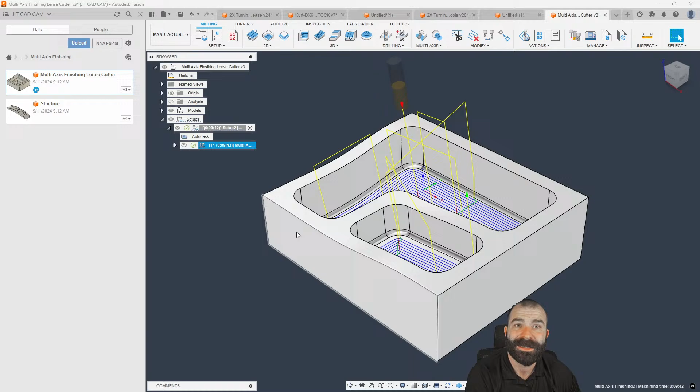So it's completely doable. Again, I saw somebody earlier, they were using ChatGPT to create scripts. You may be able to get ChatGPT to do it as well. We can develop certain things outside of that as well over here at jitcadcam.

So yeah, 100%. So somebody was asking, when you issue an optional stop, to bring the table forward or issue a command. You can actually do, instead of that, what's called a pass-through. So if you wanted to, you could do a manual NC and then a pass-through. And what this would allow you to do is create your own cycle, right? So M00, and then you could say G53, and in this case I want Y to return to 0, right? So actually, we would go G53, G00, Y0. So that would bring my table forward.

And with that pass-through put in my G code, when I post this out, so we're still on our UMC 750, what you're going to see here in this G code down at the bottom is we are now forcing our G53 G0 type motion, right? Where did it put it? It may not have passed through in this, which we could add at any time. The pattern might be throwing it off, or yours truly just needs to post out brand new code.

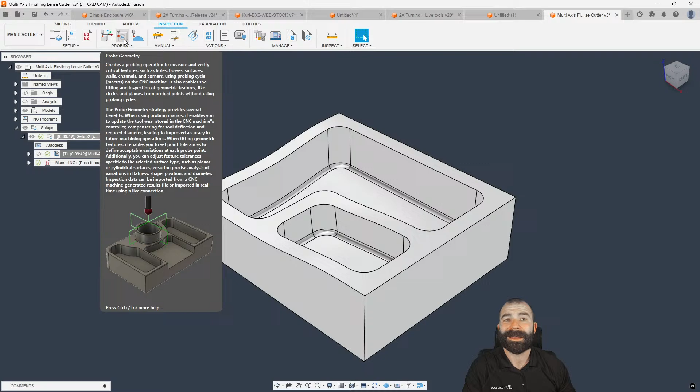This is extremely handy if you're going to do anything with probing, right? Maybe you don't want to probe every part. I want to probe every couple. Well, I could go over, hit block skip. Now it probes this one, and then it skips the next one, right?

Yeah, so again, another question here is sometimes when you're machining around a part, you may have round corners in a square block where there's going to be islands and pieces of material that you know are going to fall off or ricochet around your machine. Fusion will see that as a collision because it is thinking that that material is still there. There's really not a good way to avoid that.

Now, it really comes down to the use case, right? What I've done in the past is I've generated like a 2D contour to knock that stuff off. And then by turning on optional and running my block skip, I can just skip over that operation at the machine. Or when you post your G code, I could skip said operation, right? So now I could just post out these 4 toolpaths and maybe skip that ghost toolpath or that fake toolpath in the background.

Good news, guys. We just hit 150 viewers. Thank you, all of you, for coming out and enjoying this. I'm going to keep this going here as long as you guys keep the questions coming in. But as always, I do have to do my part, which is... this dang microphone. I keep bumping it. The cable is shot on this thing.

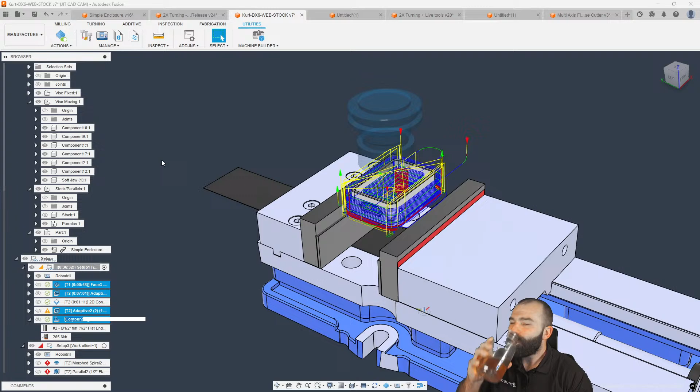Eric's saying that you need more. Oh, there's only 7 likes on this video? Man, 150 views and 7 likes. That tells you something. I miss the good old days of the downvotes. Now only I get to see the downvotes, which is very rarely do I get to see thumbs downs. Let's see here. Oh, looks like we're up to 20. You might have to refresh your page, Eric. Oh, nope. Yep, 14 likes. Yep, 14. Uh-oh. There we go. Good old OBS.

Awesome. Anybody else have any other questions? Any questions at all? Hey, we appreciate you being here. Got to pad them stats for viewer time. Trying to get up to that point where YouTube starts to pay me for these videos. We are at the 3 o'clock mark. If I don't see, you guys always do this to me. I'm going to start my outro. You guys don't have to stay for it. But every time I start to do my outro, y'all want to ask me questions, right?